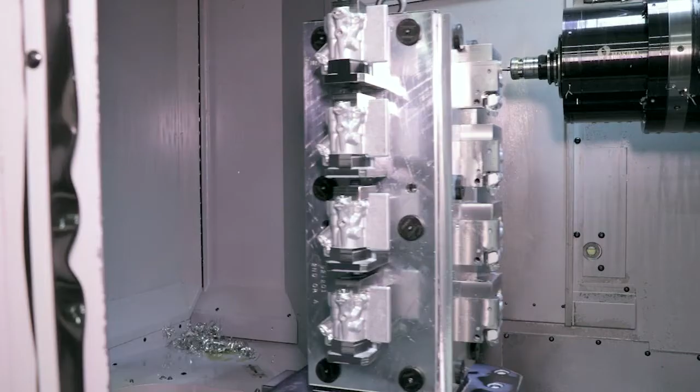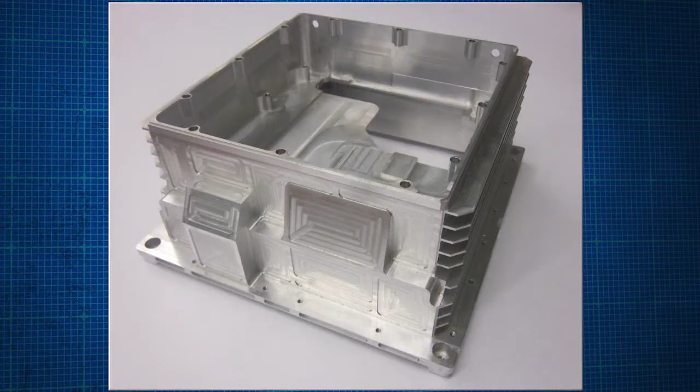Midwest Precision is a contract manufacturing business that focuses on precision machining and assembly. Midwest specializes in complicated parts made out of very difficult to machine materials that have tight tolerances. Midwest Precision's markets include aerospace, defense, engineered products, instrumentation, and energy.

They come to us for reliable delivery, they come to us for excellent quality, they come to us for competitive costs, and a company that they can depend on that lowers their risk for their supply chain.

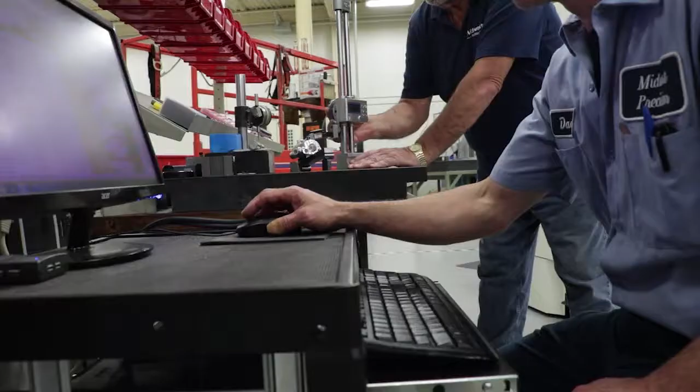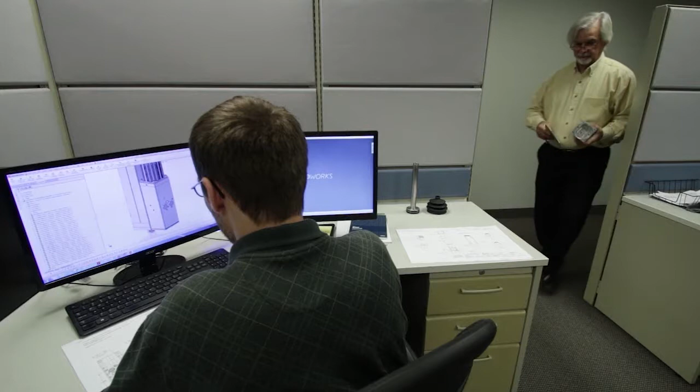Midwest Workforce, we have a very deep knowledge base. Our supervisors have approximately 25 years experience, and that really helps out when you get into complex jobs.

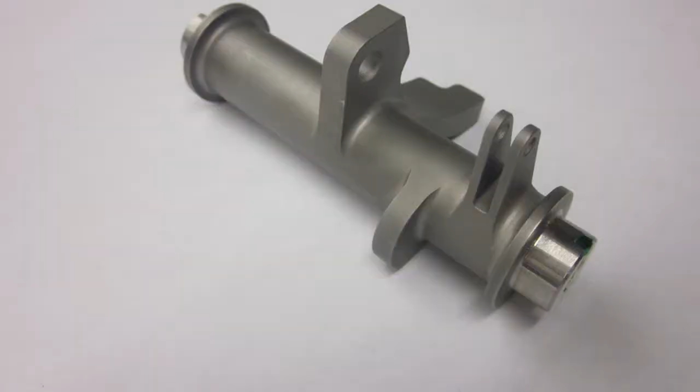Lean manufacturing allows us to concentrate on improving setups, improving part quality, improving productivity. We monitor our efficiency rates daily. Midwest's efficiency rate right now is averaging over 100% monthly.

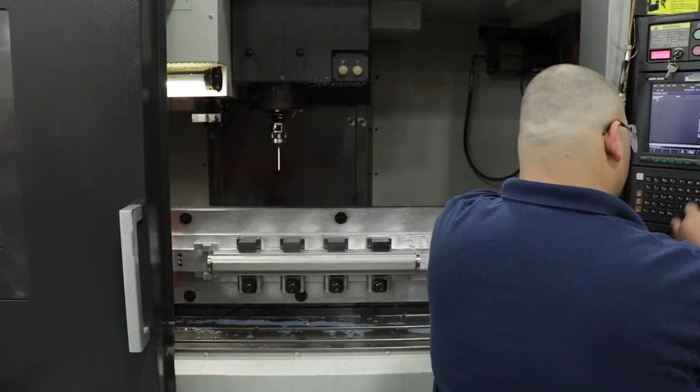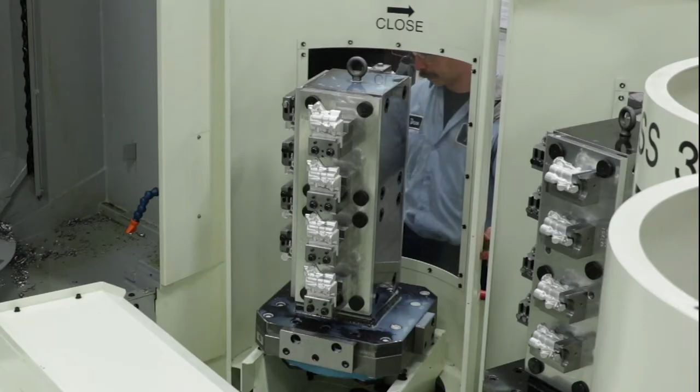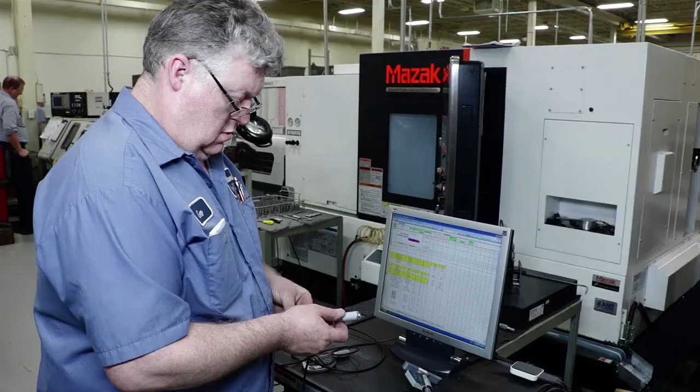We have CNC programmers on the shop floor, which allows us to take complex parts, short runs, turnarounds. We don't have to wait for a program. We give them a part print, and they're able to develop their own program. They're able to program with conversational controls right on the machine, turn the jobs around very quickly, do their first piece check before it goes into quality.

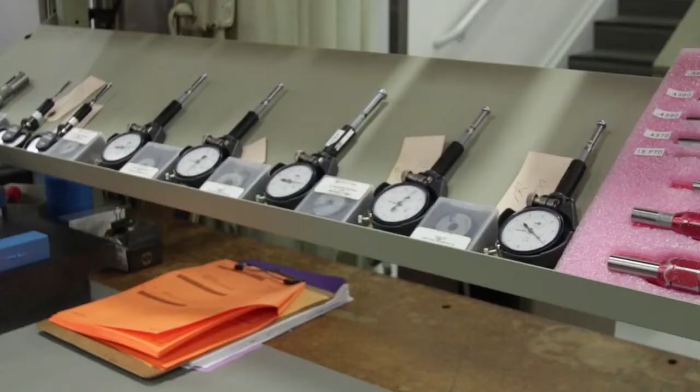Quality is our number one focus in the company. Our quality management system is certified to AS9100C and ISO 9001-2008. Beyond the quality system itself, we have very rigorous processes that support the quality system. And we are constantly driving improvements in really all areas of the company.

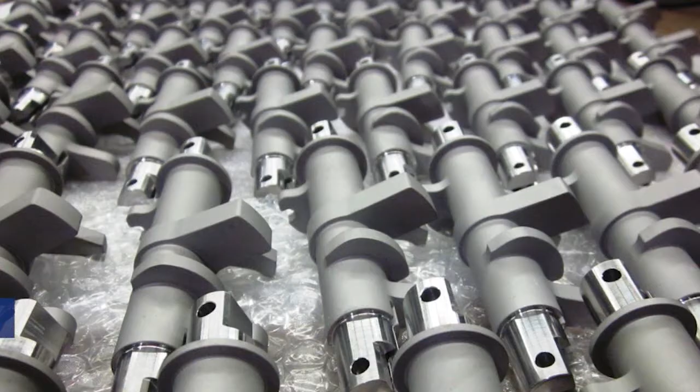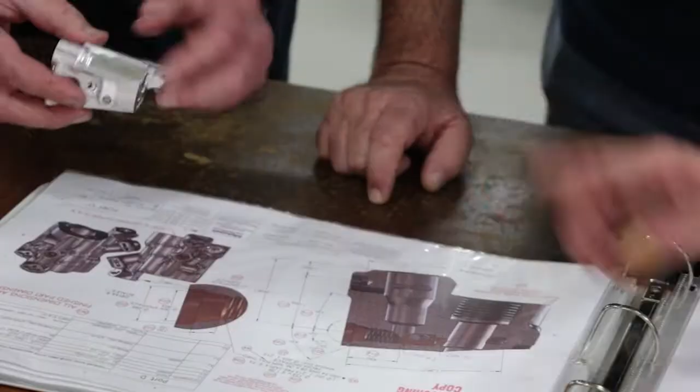Some of the things that differentiate Midwest Precision from others in our business are, number one, our ability to work on and to take on tough projects. We're very good at complicated parts that have very tight tolerances, that are made out of tough materials, and we stick with it. We work through the problems, we get the product up and running on a consistent basis, and you will never see bad quality from Midwest Precision.

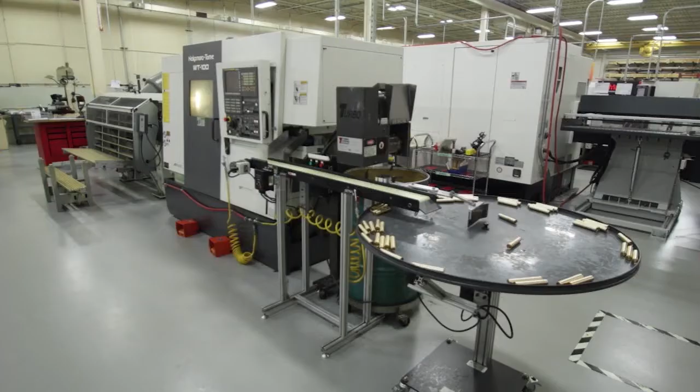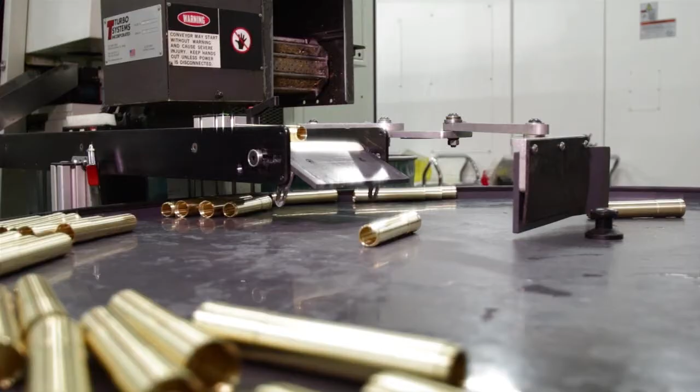One of the strategies that Midwest Precision has embarked on some years ago is to implement a lot of unattended manufacturing operation. And the investments we've made in equipment, the investments we've made in people, in our processes, are really dedicated to supporting that strategy. And that strategy requires very, very strong process engineering, very strong quality engineering, and very strong predictability.

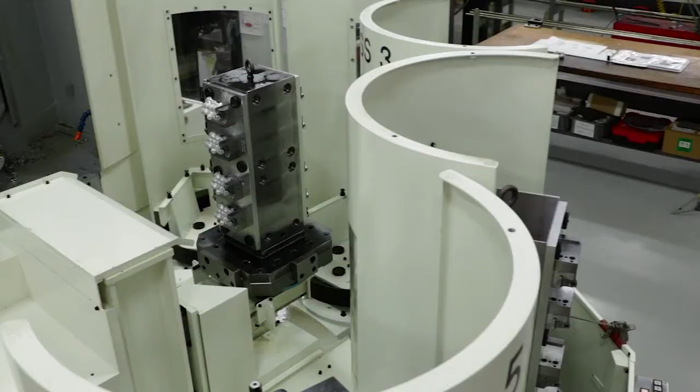There's a very large push with all of our customers for reducing costs. The cost per hour per piece is greatly reduced when you're able to utilize the hours between second and third, or any of the available hours on a weekend. When you're able to build your own tooling and fixtures, you're able to have a better handle on controlling a process.

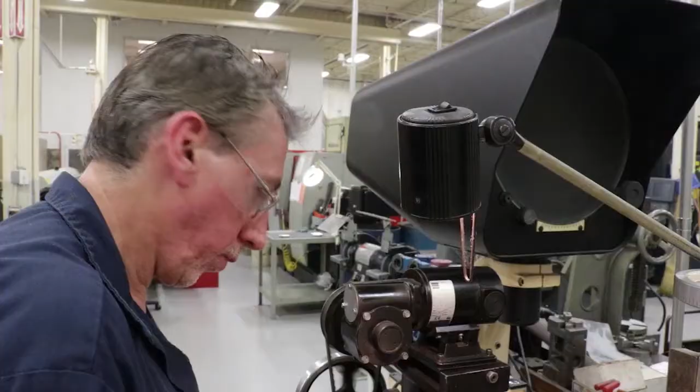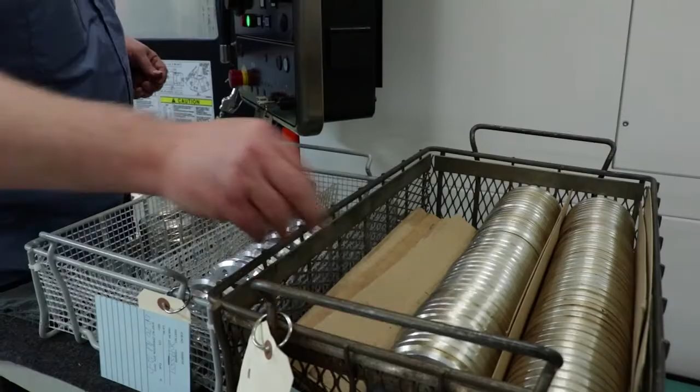Here's an example of parts that we have been making. It's been a reliable process for us, but with our focus being on unattended production, we've now moved this from a manual to a robotic loaded machine. And now with the robotic loading, we're able to run unattended between shifts and on weekends, taking advantage of more available hours in a week.

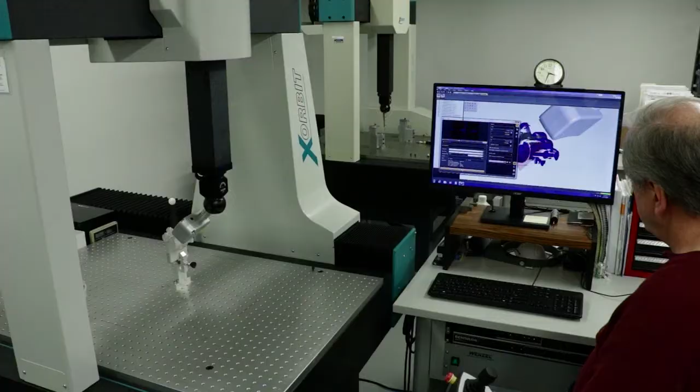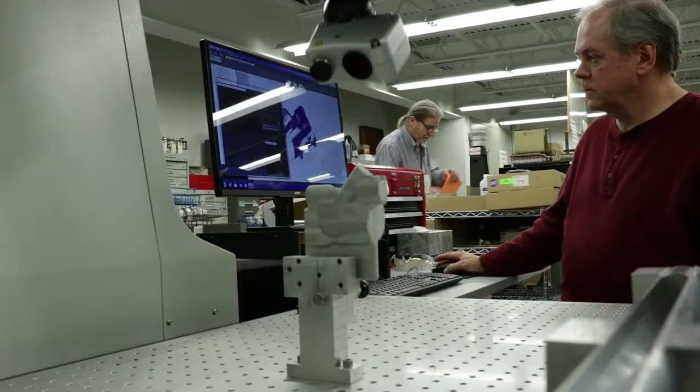Midwest Precision has made a number of investments over the past several years. We've invested in some of the latest equipment in both milling and turning. We've invested in our personnel with training and finding the type of talent we need for our business and for the type of parts we manufacture.

So if you have a tough project and you're having trouble with your supply chain on difficult parts, Midwest Precision could be your solution. Our customers that we deal with today have very high expectations, and we have continued to meet those. And we would ask that you give us a call, send us your drawings. We'd be happy to give you a proposal, and hopefully we can help you.